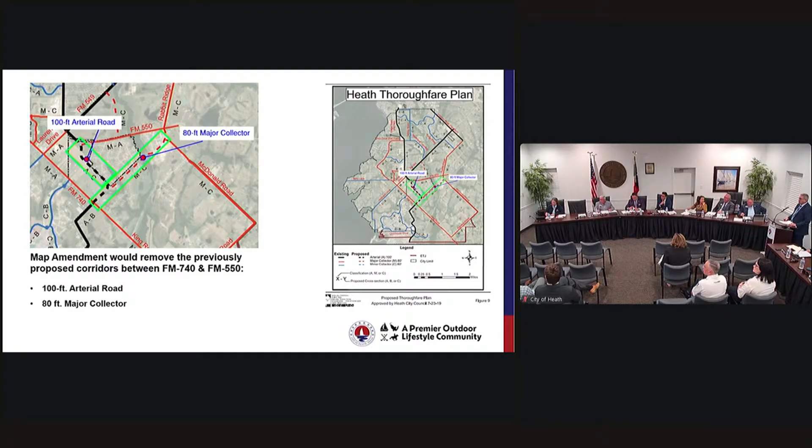This went before the Planning and Zoning Commission as well on May 5th. After discussion with the Planning and Zoning Commission, they are forwarding a recommendation of approval for this map amendment. We did provide public notice as well on the city's website as required, and staff is following the recommendation of the Planning and Zoning Commission as well for the amendment. And this obviously is a discretionary item for the city council as far as approval.

With that, I'm available for any questions you may have. Very good, thank you, Mr. Gonzalez. At this time, the chair has opened the floor for any questions of staff.

If not, we will now move into our public hearing. We will now open the public hearing at 6:35 for any residents that would like to speak for or against. Please feel free to take the lectern.

Going once, twice. Very well. At 6:36, we will close our public hearing and then open the floor for further discussion.

Council, obviously we've been talking about our thoroughfare plan at length. We've talked about the county and the county's dedication of funds, allowing us to really isolate some of these FM roads that come through our city and ways in which we can expand them so we can increase our quality of life.

We've had a number of conversations with TxDOT. I'd like to tell you guys briefly, Mr. Alexander, you can step in. Conversations with TxDOT have been wonderful, very open, very transparent. We've had meetings with TxDOT, with the county and their representatives for Precinct 3, Lauren Lichty our county commissioner, as well as who the county uses as a third-party consultancy. All of those meetings have been wonderful.

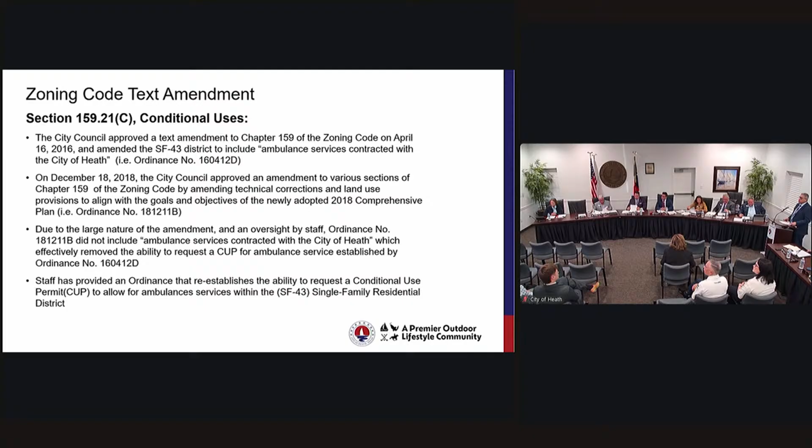At that time, there were many technical corrections to the 2018 plan, and during that portion, the amendments to the code for 159 had a lot of changes, some strike-throughs, some deletions, and so forth. However, in the 2018 code, how it read, it did not include ambulance services as it was approved in 2016 in Chapter 159 under that regulation. So we're here this evening to bring this forward to you, to take a look at this once again, to essentially reestablish that. What had happened, it looked like an inadvertent staff mistake, I guess, in essence, that was not included in the 2018 draft. That was, once again, a heavy lift at that time. Don't have any really hard evidence as to why that did not happen, other than it was not in the staff's memorandum. I provided the 2016 ordinance as well as the 2018 ordinance to show those items that they were not in there.

So at this point, this does require a public hearing. We did provide that in the Dallas Morning News as well as posted on the city's website. And also this did go before the Planning and Zoning Commission. They did hear this, and they are recommending approval, and staff recommends approval of this in order to put back in ambulance services allowed by a conditional use permit under the SF 43 district. Very well, so this is simply administrative cleanup, if you will. Yes sir, that is correct.

At this time, we do have a recusal. If you'd state your recusal. Be for the next item, sir. Very well. All right, are there any other items, Mr. Gonzalez? This will be a public hearing. Yes sir. Are there any questions for staff?

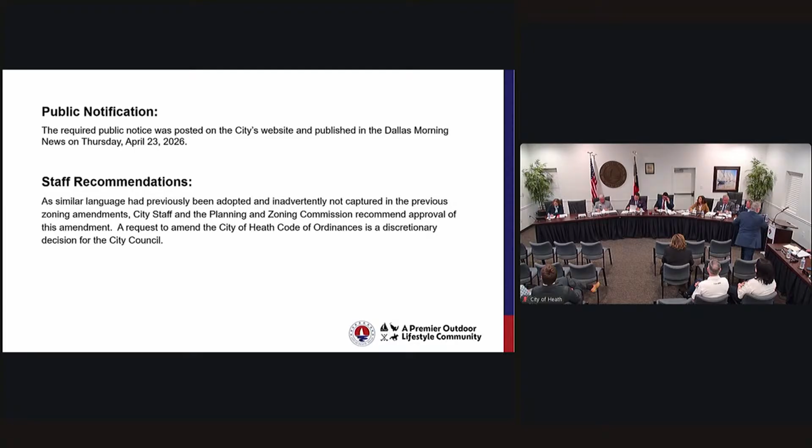Thank you, council. Moving into agenda item 5.c, to conduct a public hearing and act on case number CUP 26-1 for a request from Timothy Wolf of the Rockwall County EMS Emergency Medical Services for a conditional use permit that would allow for ambulance service on the property located at 6834 South FM 549, zoned SF43 single-family residential district, being 1.025 acres, situated in the East Teal Survey, abstract number 207, tract 11, City of Heath, Rockwall County, Texas. Mr. Gonzalez. Yes, sir.

Thank you once again, Mayor and Council. This property, you're familiar with this. Once again, this is kind of a piggyback off of what we just went through. Rockwall EMS has been at this particular location on 549 for some time, and their current CUP that was approved in 2024 has expired. So they're here in order to request the CUP once again to allow for the ambulance service at this location.

We did provide public notice. We published this in the Dallas Morning News, posted a sign on the property, and mailed out 51 notices to property owners within 500 feet. At this time we have 4 responses in favor, 2 opposed to the request. I have 2 additional responses, not in your packet, that are on your desk in front of you. I received those over the weekend, so those are there for you to review and take into consideration.

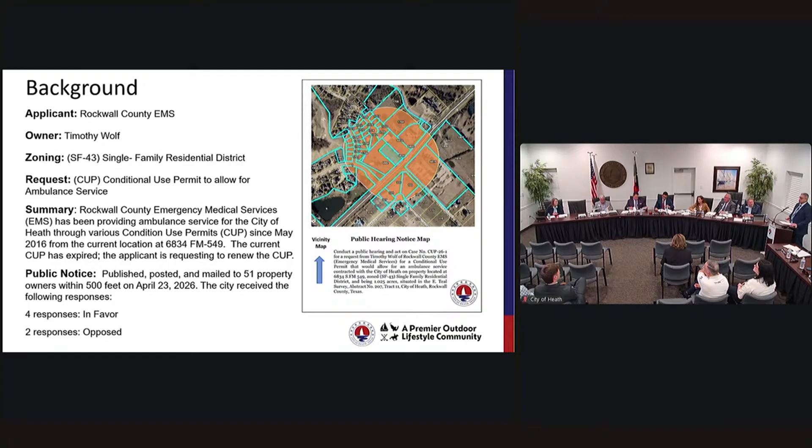Once again, the brief history—there is some history to this location, you've seen it in the past. This was granted a 5-year term, I think that's an important element to point out, in May of 2016. Through iterations here, through CUPs and resolutions and so forth, what has happened is that the facility was to bring the property up to code, essentially, making it commercial, so to speak.

By providing screening, providing a driveway and parking area, and they've done that, as well as provide a covered area for their emergency service vehicles. So the site plan that was approved with this shows that the driveway and the parking area has been completed, as requested by the resolutions and ordinances from the past, as well as the screening and landscaping components.

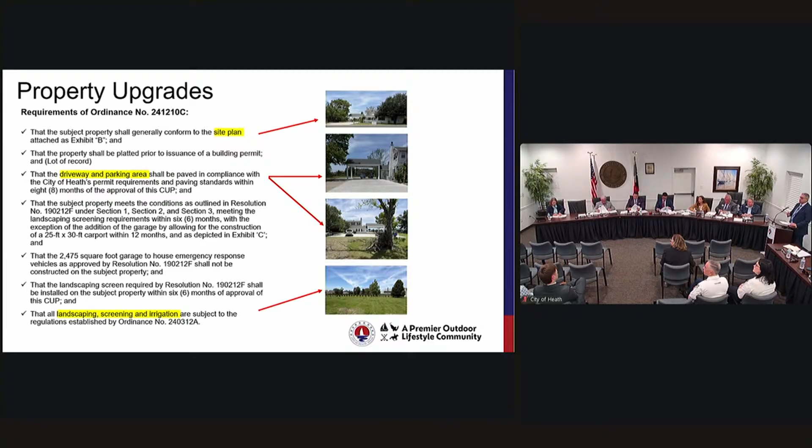And if we take a look at it from a before and after, you'll see the differences. You have a caliche type roadway or access way on the left side. And also here, where you now have a concrete drive area with a handicap ramp.

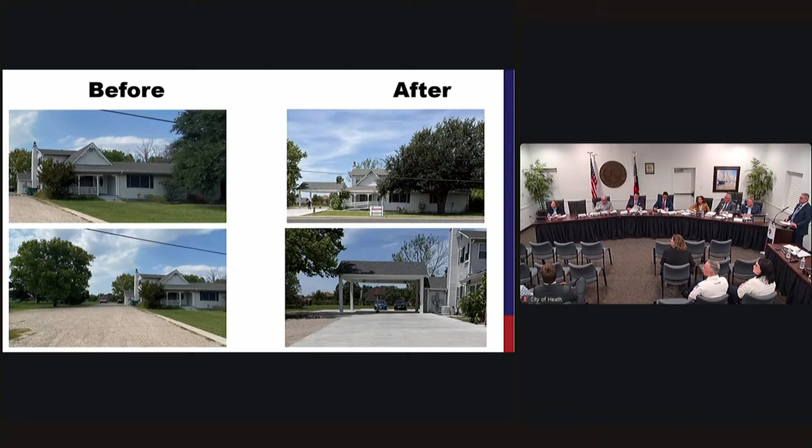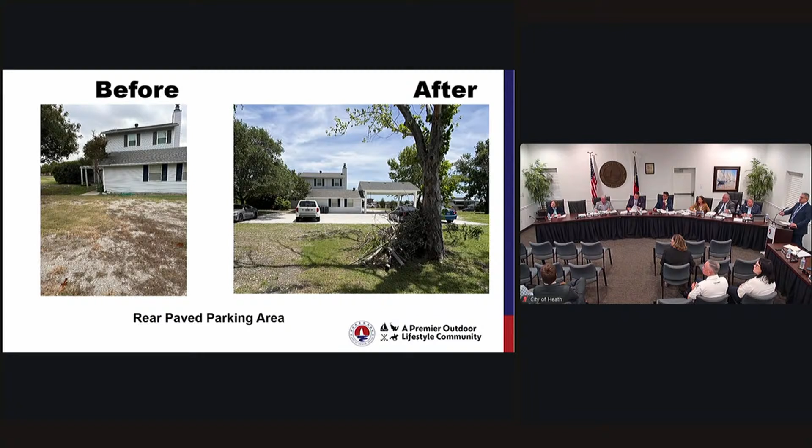They've included a 750 square foot canopy. This houses the 2 emergency service vehicles that will be located at that location, as well as the parking area behind the facility. You've seen the upgrade here—tremendous difference in what was there—and also the landscaping and screening that was required by the resolution.

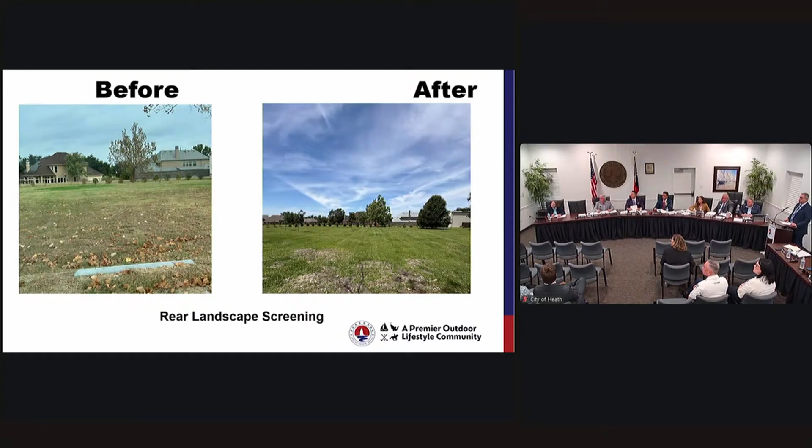So all these items, the construction on the site, has been taken care of. They've put everything in place and met requirements, and so now they are bringing this forward for the application. Once again, we did provide public notice, and staff took this to the Planning and Zoning Commission as well. They're recommending approval, and staff is recommending approval of the CUP as well. Once again, this remains a discretionary decision for the City Council.

Amy Ramirez is here with Rockwall EMS, as well as Aaron Howell. They're here to answer any questions you may have, and staff is available for any questions as well. Very good.

Thank you, Mr. Gonzalez. At this time, do you have any questions for staff? None? Very well. Do you have any questions for the applicant?

Point of information—I have recused myself from this item and have the affidavit on file. Very well, thank you, sir, for putting that on the record. We have the recusal notated.

All right, at this time we will go into a public hearing at 6:51. If we have any residents that would like to speak for or against this application for case number CUP 26-1.

If there's no one to speak, we will close the public hearing at 6:51.

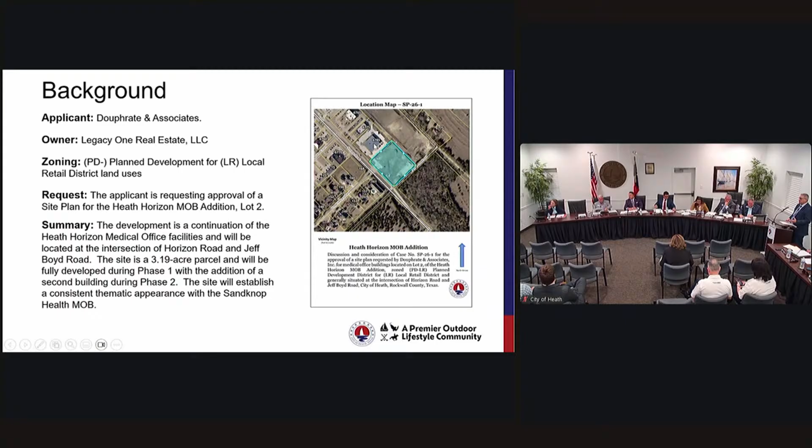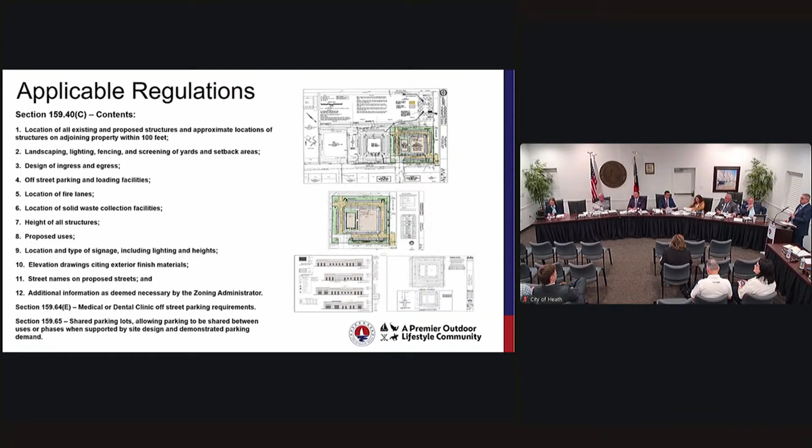Once again, thank you Mayor and Council. This site plan coming before you is more along the lines of a campus type facility, as you'll see in the site plan. The facility next door, the Sandknop Building, was the first one that came in, so this is a continuation on this particular lot. Staff takes a look at the site plan, the landscape, the lighting, the ingress, egress, and circulation, and what the building's going to look like. We worked through that with P&Z and ARB, who reviewed all of the associated plans—you have the large hard copies here as well—and they're forwarding a recommendation of approval.

Let me go through some of this on the site plan itself. The particular use here is a medical office building, parked at 1 space per 150 square feet of facility. Phase 1, this location, is a 20,150 square foot building, requiring 134 spaces. However, when you add in the phase 2 building, the site will be underparked. So to build phase 2 in the future, the applicant is coming forward with a shared parking agreement, which will shore up the required parking. Right now phase 1 meets that with 167 parking spaces laid out on the site plan against the 134 required. There's a letter in your packet from the owner providing 9 parking spaces over on the Sandknop building—they have in excess of 9 spaces there—and P&Z and ARB recommended some cutouts for walking over to the facility, which meets the technical requirements for a shared parking agreement.

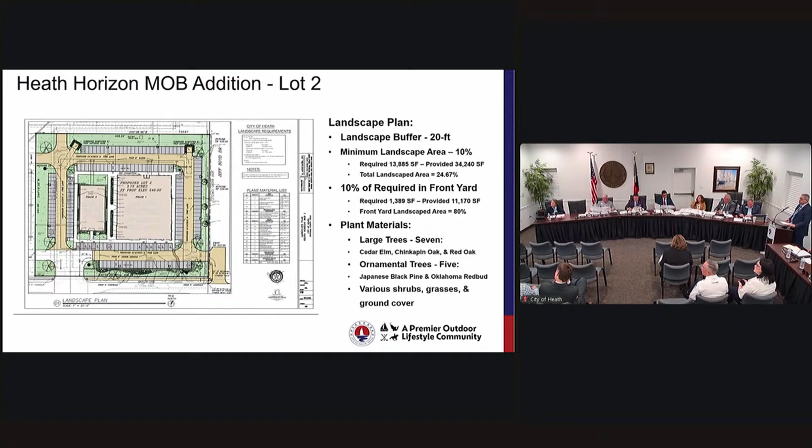We also look at the landscaping—this is over-landscaped, which is great, and meets all the requirements of the Texas Smartscape website for drought-tolerant landscaping and materials. They'll provide 7 large trees, 5 ornamental trees, and an assortment of shrubs, grasses, and ground cover. We also look at the photometric plan. We have the dark sky ordinance in place, and this site meets those requirements—fixtures are shielded, correct color temperature, maximum pole height of 20 feet, with the overall site meeting the 0.5 foot candle ratio required.

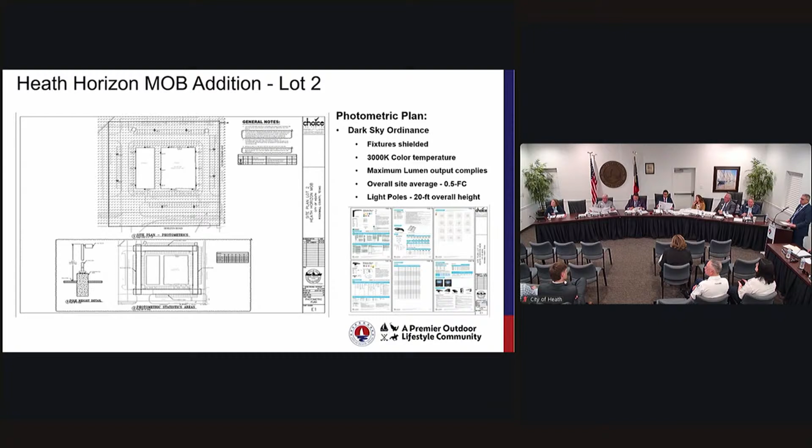Now the building, what you'll see here is that the materials they're using are the exact same materials that you see on the Sandknop building. So this is where you have the thematic appearance of the building that will create that campus style feature here that's going to be adjacent to them.

They're using a brick veneer and a Lueders limestone. You do have some stucco for banding elements along the top. You have some articulation in it that creates some shadow lines and some variations within the elevations that keeps this a nice looking facility.

Overall height of the building is 25 feet 6 inches. That's a whole lot lower than the maximum that they can go. They can go to 40 feet, but they are keeping that as a lower profile unit there for the entry.

Staff did take this to the ARB and P&Z, and staff is providing these 6 recommendations that came from the ARB as well as the P&Z, and most notably would be the parking requirement that they bring that forward to you at the time of site plan for phase 2, and technically the phase 2 portion will probably more likely be approved as an administrative site plan, because everything else is in place. The thing we're looking at is just to make sure that we do have the shared parking agreement and the 9 parking spaces we've outlined here to make sure they meet all of that.

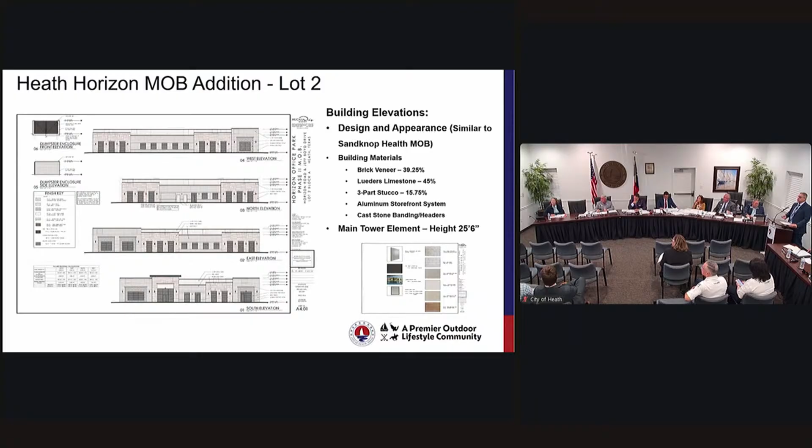Thank you, Mr. Gonzalez. Do you have this site plan laid out on a map so we can see it? You can see it on your slides. In regards to the location, as far as... Correct, so there's a vicinity map. Let me go back to the site. So this is to the north side of the current Sandknop building, is that correct?

This would be on the west side, east side of the Sandknop building. So if you take a look at the Sandknop building here, you have Horizon Road, and Jeff Boyd is on this back side, and this portion is Jeff Boyd as well. So this will be on the east side, making connection here to the Sandknop building. So this is where the circulation comes in as well. So it's on the east side of the Sandknop building. Okay, so it's to the right, and it's the south side of that property. Understood, yeah, southeast. Took me a minute. All right, now we understand where it's at.

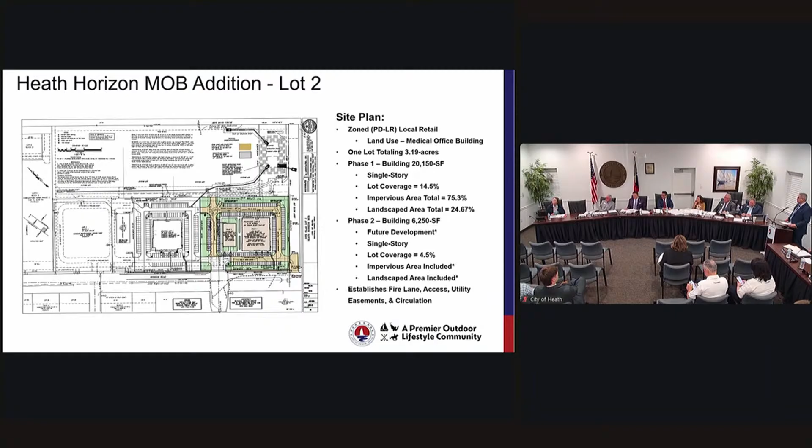Yes. Okay, and on the parking, they're missing 9 spaces, is that what you said? So when they bring in phase 2, it will be 9 spaces short. I'm not talking about phase 2, right now. Right now, they would have all of the parking in place. They have 167 spaces, and phase 1 requires only 134 spaces. Okay, when they build phase 2, that's when they'll need the 9 spaces, and that's when the shared parking agreement comes into play. Understood. Yes, sir. Okay, and they're gonna pick up those 9 additional spaces from the Sandknop Brew? Yes, sir.

It's gonna be tough for them to find 9 spaces at that building if you've gone over there during business hours, extremely packed. And from a planning standpoint, when you take a look at the site plan that was approved for the Sandknop building, they do have 9 spaces available. And so that's how we're getting that number. That's how the applicant determined that and was able to make that adjustment at the time that they originally came in, in order to maximize the parking. Okay.

Very well. Council, do you have any questions for staff?

I have a question regarding the path that was recommended. Is that the yellow highlighted line? That's kind of just an area to show where that could be. There's probably several different areas where you could make that connection.

Wouldn't that take up some of the parking though? They have sidewalk already identified. If you look, there's already sidewalk entrance and exits.

Right, but are we doing a path in the middle of the parking? I don't believe that's what I thought the yellow highlighted mark represented. Is it additional parking? No, the other one - oh, I'm sorry, that's what you're talking about, right? That's here.

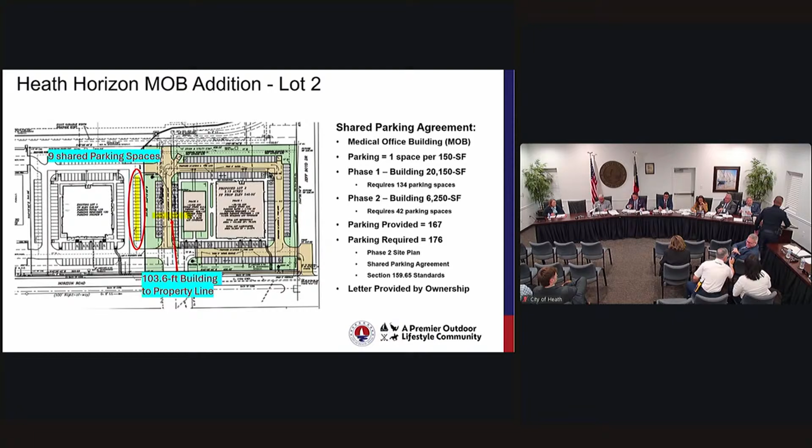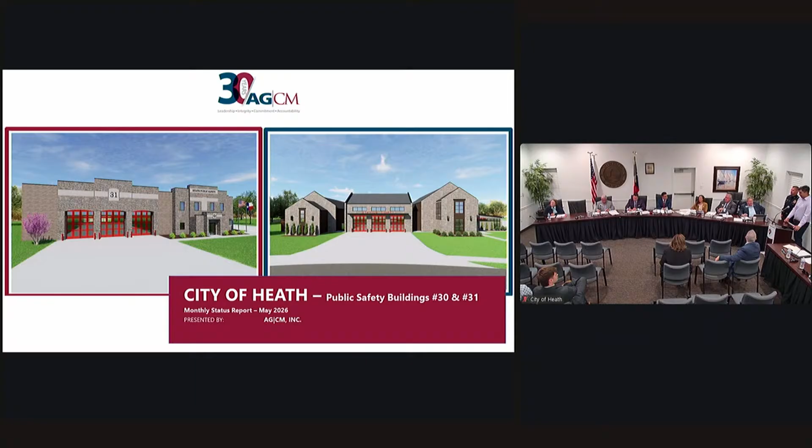Good evening, Mayor and Council. Tonight for your consideration, I have Marcus with AGCM to provide an update on Station 30 and 31. Thank you, Mayor and City Council, for letting us present today. We're just going to give you a quick update of what's occurred in the past month since we've been

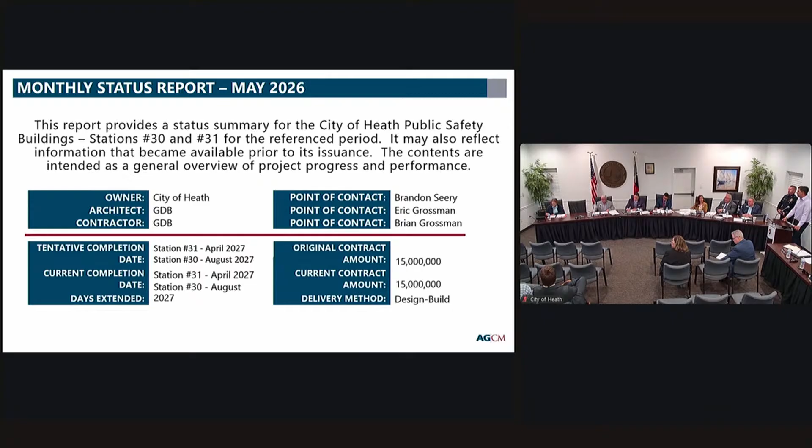out here. One thing that wasn't posted last presentation was we do have an established completion date projected for Station 30. We're scheduled to move equipment out on site today, but due to the rain it just got delayed a little bit, but we will be starting some work on clearing and grubbing out there. That doesn't really slow you guys down much. There's been a few days that I was like, wow, they are still going at it. Very impressive, thank you.

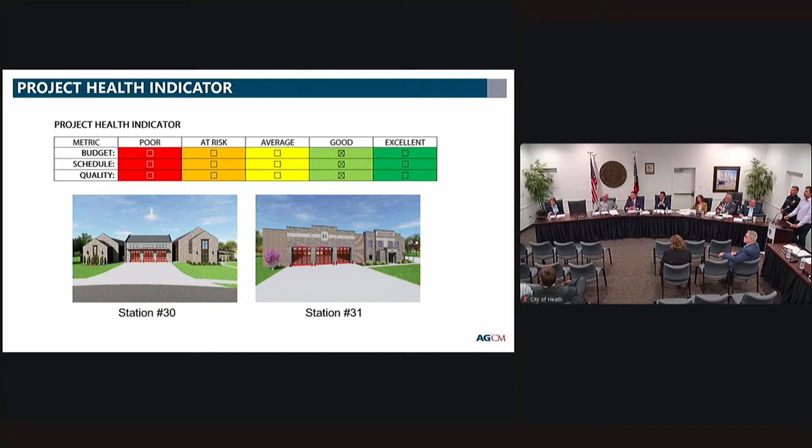This slide will disappear because pretty much we've managed to sustain at the GMP of 15 million. Just wanted to keep this to let y'all know what we established the budget at, but moving forward really no need to reiterate this. A project health indicator: budget, of course, is doing good. Schedule is slightly slipping, but we're still able to improve. We'll get into that in a little bit more detail. And quality is staying up to par, making sure they're looking into the materials being installed.

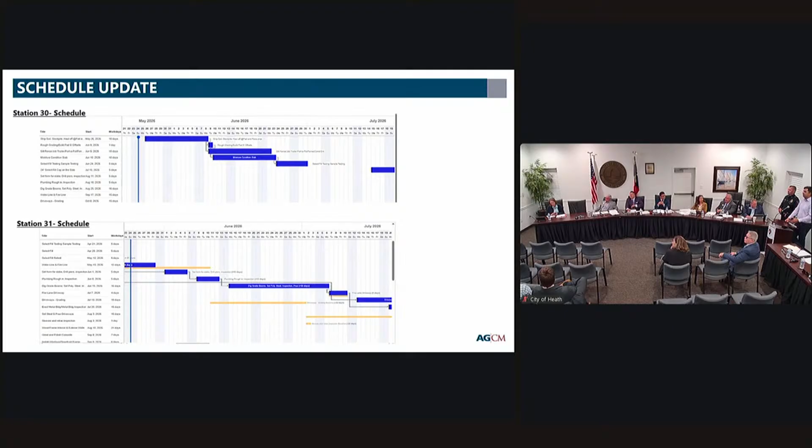Here's our current schedule for Station 30 and 31. As you can see, we had a scheduled start of the 26th for 30, and then just kind of the projected outlook for the next month. Station 31, I'll get into a little bit about why there's delay, but one thing is that Grossman has stepped up and created an accelerated schedule to accommodate the issues that arise out of the project.

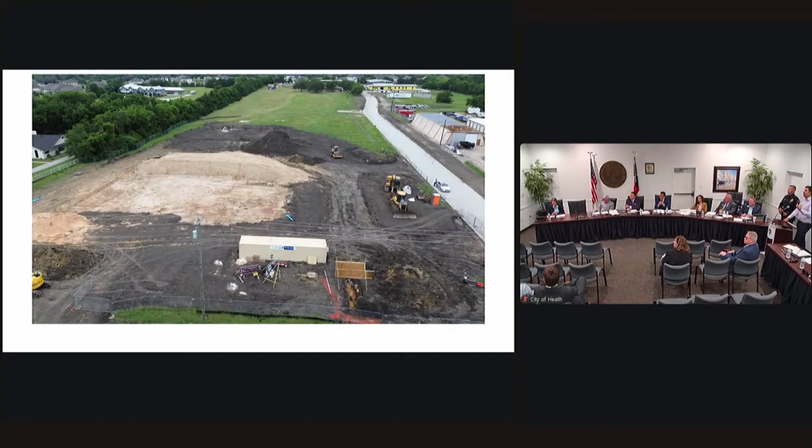So here's an aerial, or is this the video? Okay, so here's a video kind of showing you what's ongoing. As y'all notice, all this select fill has been moved off the building pad, and that's kind of where our issue currently is. We spent a decent amount of time getting the correct proctor and material selected, and once we got it delivered, one thing I want to compliment Grossman Design on is they went above and beyond and did quality assurance to ensure it still met the proctor.

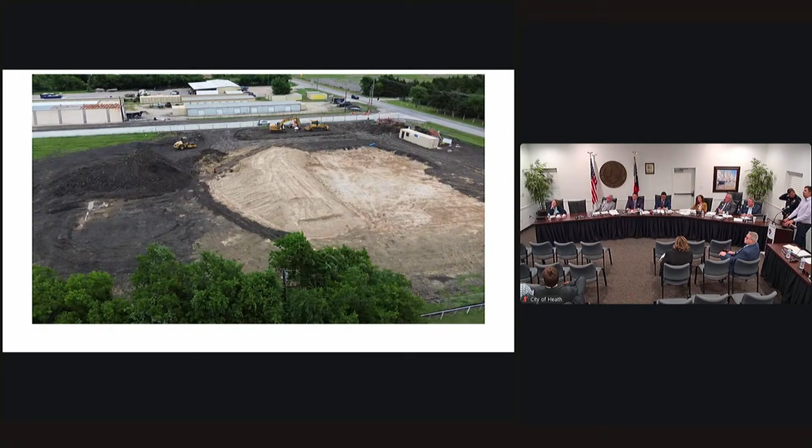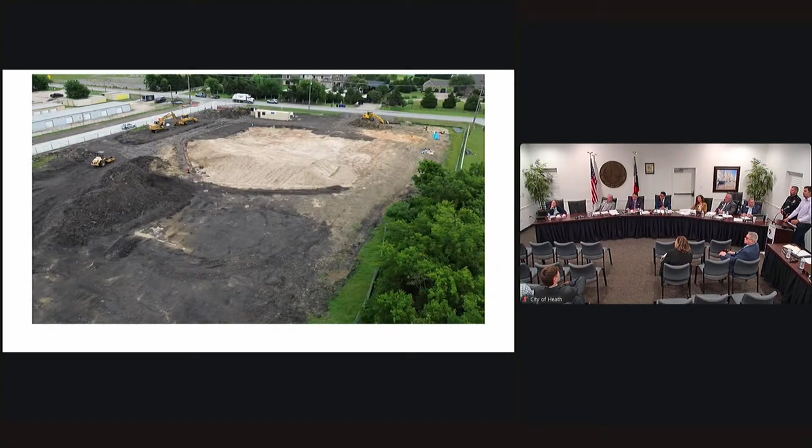After they completed the installation, which takes about a 3 to 4 day process, they tested the material and it was determined that the PI didn't meet the standard. So they took it off and were mixing it, working through to make sure we can get that appropriate PI before we place it back. Grossman Design, we've delayed about 2.5 to 3 weeks with this issue, but they've decided if we're not able to get our proctors up to snuff by the end of this week, they're going to go ahead and get select fill from another quarry to continue on with the project. Still, there is no concern on meeting our initial deadline and meeting our contractual obligations. So I just want to make that clear.

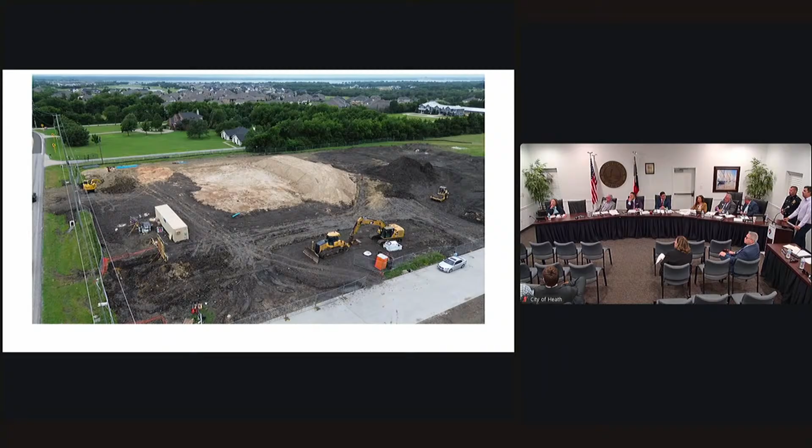Just real quick, here last week they did their initial tie-ins for the fire line. Majority of our underground's been completed, and all of our fire lines are installed. There was a little disruption to the community from a disconnect of temporary water for about 3 to 4 hours on Thursday, but we're back up and running and there shouldn't be any issues downstream. So that's a run through on Station 30 -- apologies, Station 31.

I'm going to provide this document; we're planning on starting today. The other ongoing activities are coordination with Oncor and Atmos to make sure we get the appropriate service and understand where those locations are going to be implemented so we can get the correct pathways. We're currently working with Public Works on a drainage channel where some overgrowth came up, and we're trying to figure out the best approach to continue construction while revising that drainage channel, without impeding the construction schedule or anybody downstream.

Another item, on the bottom left you'll see the mock-up. We initially went through an original selection, and right now we're just trying to finalize our colors. As you can see, it all clashes, and Grossman's first statement was that we're not approving anything right now. The only thing we did release, to make sure we can manage our schedule, is the metal panels for the building. We're going to keep the metal panel right here and right here -- those are going to remain.

Of course, the board and batten colors are going to be revised. We're going to revise the brick, and I believe we're going to keep the stone -- the top gray stone is what we're going to keep. So really these two components are remaining; everything else is going to be revised so we can get a more cohesive color selection, and match the aesthetics of the neighborhood. That was an item Chief Siri wanted expanded upon.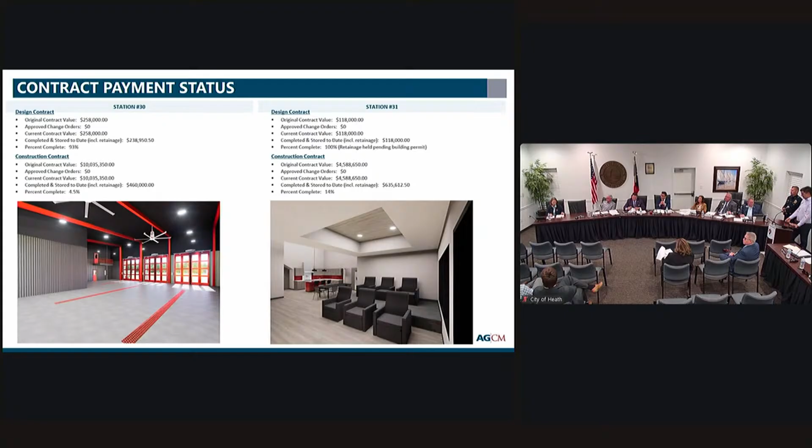That's all I had. And I also want to mention Bob Myers is here. He drove all the way down from Sherman, so we got to make sure he gets credit for coming by. I saw Bob sneak in.

Very good. Any questions? Council, do you have any questions? Chief, question for you. Yes, sir.

Which facility will have your training room, and is that still included? The training room is included. That's going to be at 30. What we're desiring to get is the training structure, that will be at 30 based upon our budget. So that'll be behind that Station 30. Well, the pad's going to be there and everything.

Is there going to be any funds remaining once we get to the end? Because we have some contingency built in. Understood, thank you very much. Yes, sir. Thank you. Great question. Thank you. Thanks again, appreciate it.

Bob, great to see you. Appreciate again the hard work, guys, and again great job. Say you guys stay on schedule. Don't look at any other buildings as any milestone markers. But you guys have been very impressive and very engaged, and it's very much appreciated. So thank you. Yeah, absolutely.

All right, at this time we will move into agenda item 6.c, discussion and update on current capital projects, to include but not limited to the Hubbard Drive project, the Water Bridge Plan, Towne Center Park project, Terry Lane Road rehabilitation, Candlelight Fire Flow, Public Works Facility, Trails, and the Street Maintenance Program.

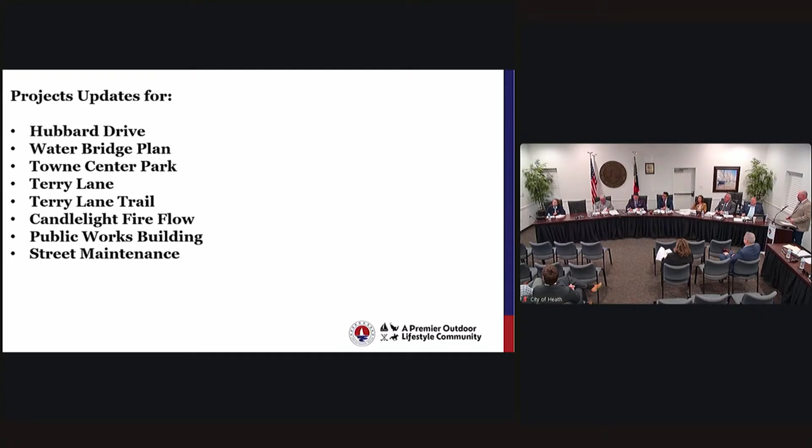Mr. Creed. Thank you, Mayor. Good evening, Council. As you stated, it's a project update for all the projects we go over every month. The first one being Hubbard Drive.

The update on this one is they are still working on the excavation. They've done some ground stabilization. The water line crossings have been put in. Some storm has been put in, not all. We have a sewer conflict we're working on right now. I think we have the change order in with the city and the review. We get that going, and we get the sewer relocated, that's in conflict with that, and we can move on concreting the portion that's already stabilized.

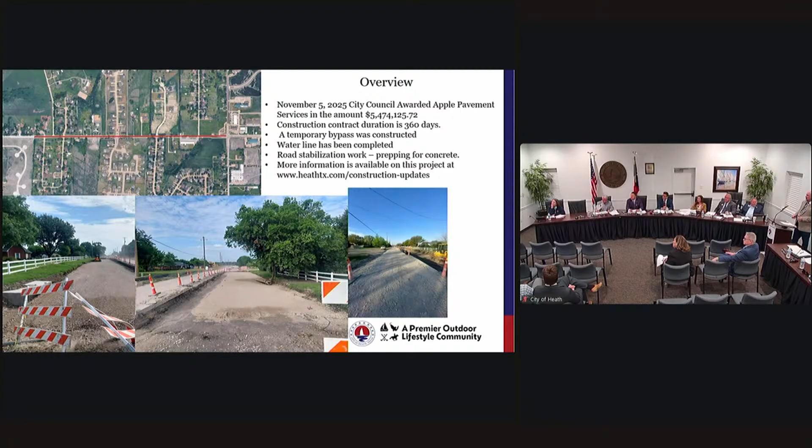If you guys have been out there, you'll see they've excavated and stabilized, subgraded these two portions. Those two photos there on the bottom left, I'm standing at Crisp, and I can look both directions and see the construction area. And the far right is the bypass road. Again, this is the detour map. There's no changes to it as of yet because we haven't completed this portion to move up.

Yes, sir. The delays that we're seeing on Hubbard, does it have to do with this interceptor line? It is not an interceptor, but there are some delays waiting on that, and also the weather is a problem.

And then if there's no more questions about Hubbard - are there any other questions? They have laid some forms on the far end down there and tying in, they have, we were getting ready to do the concrete work. We do have to get past the sewer issue, and then there's some questions about how we're going to move forward with the actual operations of the concrete they're working through as well.

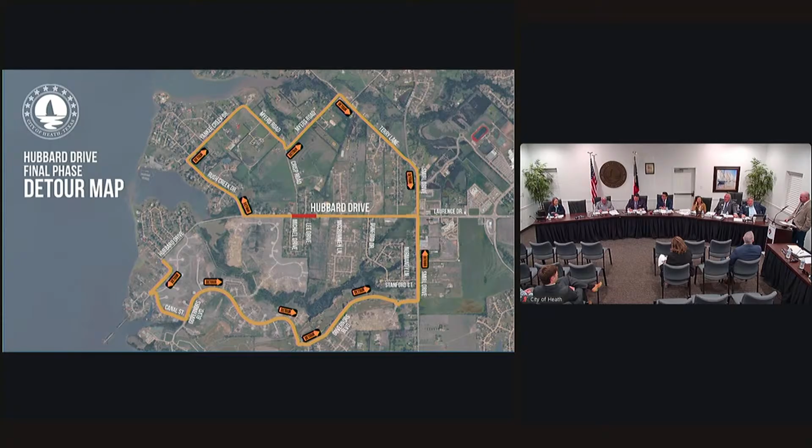That face says it all, though. It does. I apologize. So, all right. Okay. Any other questions? Good. Keep them on track.

All right, the next portion of this is the City of Heath Water Bridge Plan. The first item on this is the City of Heath Water Well number 1. We actually have Kimley Horn here tonight. They would like to give this presentation about the water well. And we have Tanner Henson and Kenny Fryer that would like to come up here. It's always great to see Kenny here.

Well, we're here to talk about water well number 1, which is just over here in Towne Center Park. I'll just cut to the chase - it's good news, 700 gallons a minute. It is potable coming out of the water well, coming out of the aquifer. We just have to dose it with some chlorine, and then it will enter the distribution system.

The driller has been a good partner to Kimley Horn, to the city, city staff - Steve, Brian, Michael have all been great partners, very responsive if there has been a question or anything like that come up. Tanner, got to brag on this young man - he's been down in the weeds, serving the city, answering questions from the driller. He's been doing a wonderful job. So I'm going to let Tanner take it from here.

Awesome, thank you Kenny. Good evening council. So like Kenny said, water's been located, it is potable. I want to give you an update on where we sit right now, the current work that's going on, and the work that is still planned for the future. We had the rig down date on March 13th, so the rig is off-site, and like Kenny said, 700 gallons per minute. That equates to 1 million gallons per day of additional water supply that is expected by next summer, about a 15% increase over the current water supply.

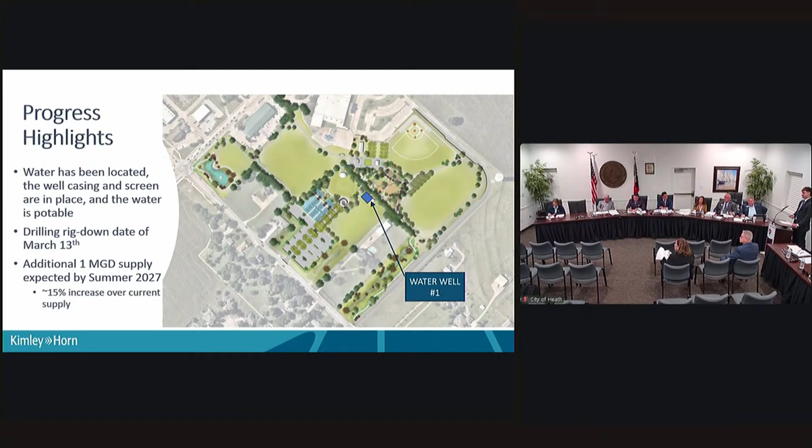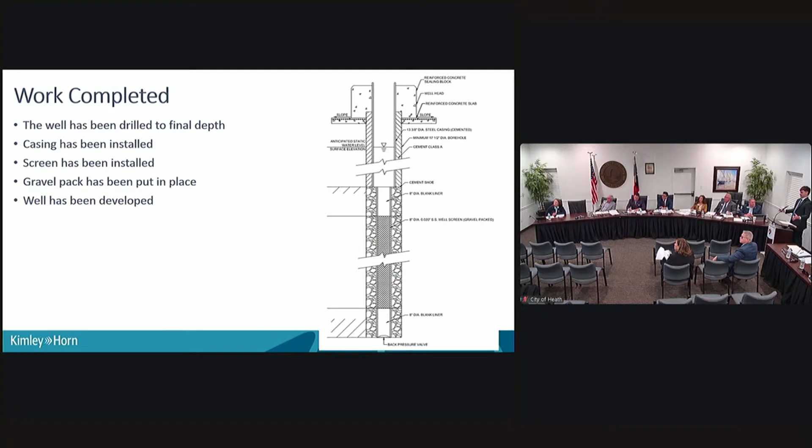For the work that has been completed, the well has been drilled to the final depth. The casing and screen have both been installed. The gravel pack was put in place around the screen to allow the water to go from the aquifer through the screen into the well. And the well has been developed, meaning the gravel pack has been set against that screen and it is able to produce that potable water.

A bit more detail on that well development step - it settles that gravel pack against the screen, and also helps clean the screen so the well can produce more efficiently. Through conversations with the well driller, they stated that this is one of the most successful well developments they've seen, in terms of the quantity and quality of water they saw during the well development process. That gave a lot of confidence towards this being a great well, which we did then see come to fruition through the test pump, which I'll talk about here in a little bit.

That's because it's a Heath well. That's correct, that's why it's better. There was a whole lot of prayer over this site. Power of prayer.

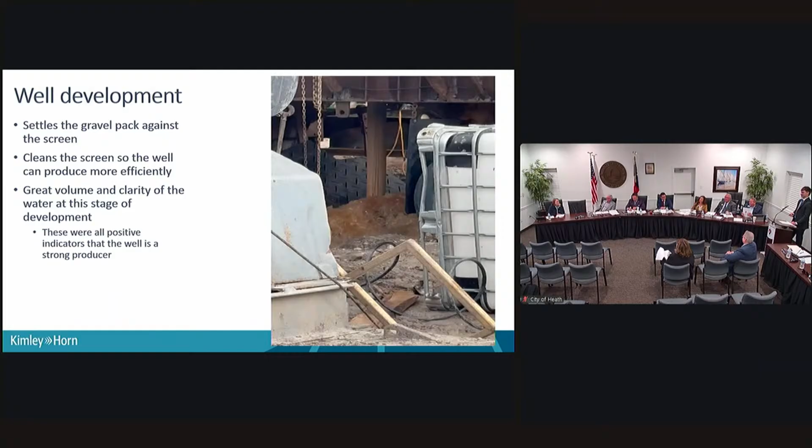Oh, and here is a video of the well development process.

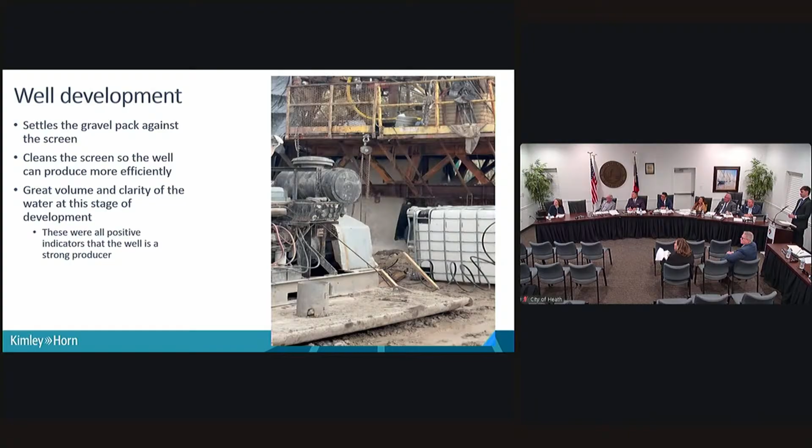That's so awesome, so that is before the test pump was installed. They run giant blowers with hoses down to introduce high pressure air into the bottom of the well, so that it pushes the water up out of the well and then helps set that gravel pack against the screen.

And I'll kick it back over to Kenny to talk about some more work that's been completed.

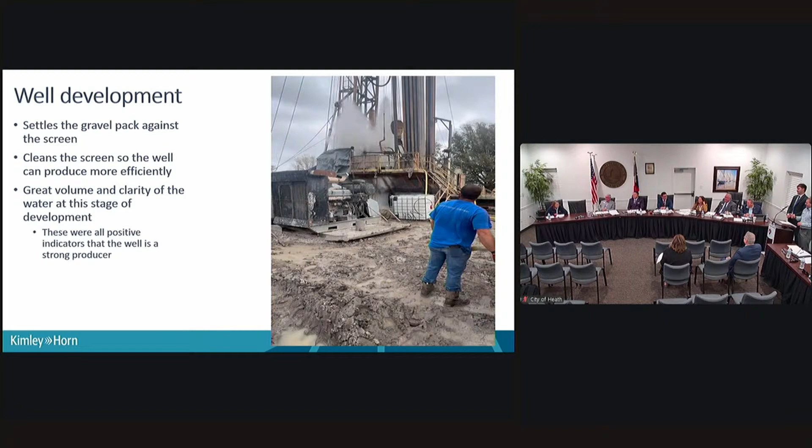I've got a funny story on developing a well. One of the first ones I was able to work on and be on site right after I graduated college, I was the only person around when the water started coming up. I noticed all the other people working on the well had backed up, and then this loud noise came up and I got soaked. So I learned in that moment, watch what's going on around a construction site and do what the other people are doing. Always watch the Roughnecks, whatever they're doing, follow suit.

So work completed to date: the drilling rig has been demobilized, and the pump test performed. What we did on the pump test is we had 3 different intervals at 12 hours each, from 500 gallons a minute, 700 gallons a minute, to 900 gallons a minute. What we want to see there is the aquifer, once it's pumping over the course of several hours, will tend to come to a steady water level, and that's what we really want to see.

The calculation that we take from that data is called specific capacity. A water well between 2 and 5 gallons per minute per foot of drawdown is considered an efficient well. This one was in the 2.3 neighborhood, so a very efficient well. Specific capacity is really just an efficiency calculation.

Water quality testing was performed. All water passed the state TCEQ primary and secondary levels, everything was below the MCLs, and water is not quite potable coming out of the ground. The water becomes potable once it gets dosed with chlorine and enters the distribution system.

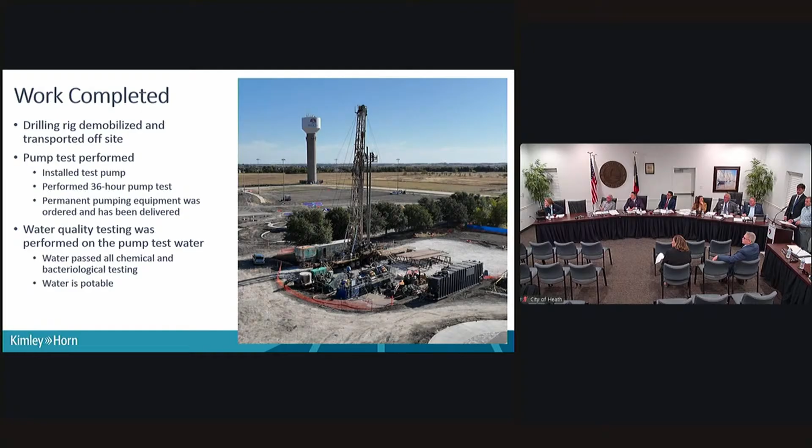So, ongoing work: temporary pumping equipment is going to be installed this week. I got to brag on the driller too - very flexible. When staff came to the driller with here's what we're wanting to do, they were flexible in accommodating that. So they've been a good partner in this project.

The permanent electrical equipment is being coordinated and ordered. Upcoming work is ongoing work at the well site itself, the disinfection site work with the chemical buildings, the injection systems, and the chemical analyzer.

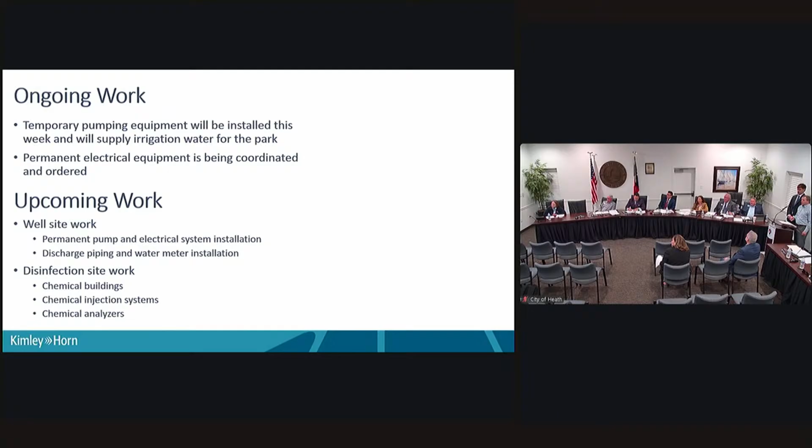So, summary: construction is going well and going in a positive manner. Project is transitioning from the drill phase to the surface work phase, and all partners... Steve, you look like you have something to say.

Kenny, I was hoping you could talk a little bit about the temperature of the water, and how you and Garver are addressing it. Yes, of course. So the water coming out of the well is a little warm - 120 degrees, 113 degrees coming out of the ground. Not a major issue, just a minor characteristic of the water coming out of the aquifer. We've worked with Brian and Michael, and we'll meet with city staff soon to walk through a couple of options we've developed. It's more of an operational thing to cool that water down. Again, nothing I'm concerned or worried about, we'll be able to manage that, just a unique characteristic of this aquifer.

You feel like we'll have to install some sort of chiller, or will just the patterns of the water disperse and cool before it hits the plant? That's one of the options we evaluated. I think the one that makes the most sense in this case is to blend it with water that's already in the elevated storage tank, and that's the best way to cool that water down. Which was one of the original strategies.

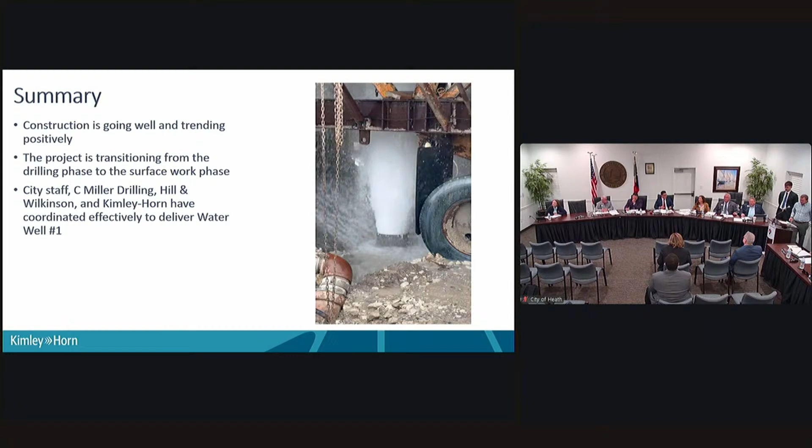I have a quick question. Is it already irrigating the lawn in the city park, or when will that happen? When will we actually use that water?

The well water - they're installing the temporary pump this week. The temporary electrics have been put in. Once they're tied in, they have to finish up the wellhead. We got the sitting block poured last week, so you can see the wellhead sticking out of this concrete block. Once they pull the test pump, which they're literally doing right now while we're having this meeting, they're pulling pipe out of the ground.

I was talking to Councilman Dotson about that, and you can see them pulling the pipe out of the ground. Once they get that old pipe and pump out, they'll put the new pump in, tie in the electrics, and all they've got to do is finish that wellhead, and we'll start pumping water over here. He expects to have that done by early next week, and we can start pumping water into the pond fast.

Wow, very good. Well, I have so many questions, like when that water keeps spurting out and then goes back down, why is that? I'm just curious, it doesn't continue to flow out like that?

No, how do they control it? That's caused by air - they pump air down in there, and that blows the air out, and that's when the water comes out. The development that Tanner was talking about, that was from the air jetting that forced that water out. That's what happens.

So interesting. Is it maybe warm because we've drilled the wells so extremely deep, deeper than most wells have been drilled? That's part of the reason. The Trinity in this area - that's a unique characteristic of the Trinity here - has warmer water, around 120-ish degrees. Other areas of the Trinity are more like 70 to 85 degrees.

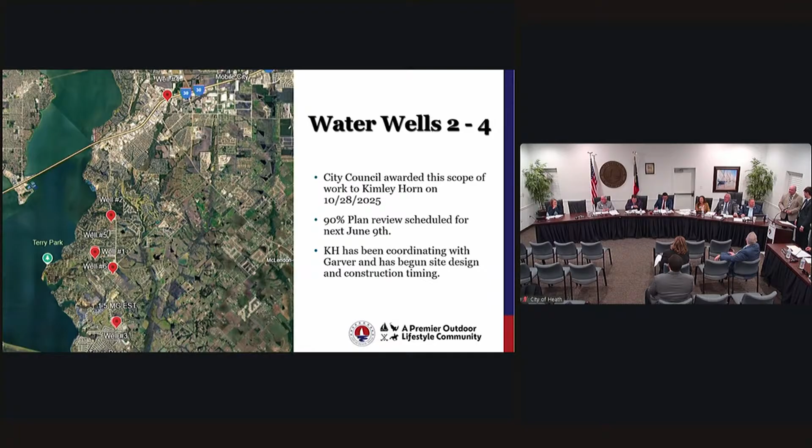All right, Mr. Creedon. The next thing is the City of Heath 1.5 elevated tank that is currently planned to be on Governor's. That went out to bid last week. We have a pre-bid meeting on the 3rd of June and expect to open bids on June 12th. The review after that is anticipated, hopefully, to bring that to you guys for approval on the 23rd of June, and after that we'll be ready to give the notice to proceed and move forward with construction.

I'll answer any questions. This is a 100% design. It's a landmark tower, just like the one you see at Fulton, only bigger. This is the design you see in all the cities. The only thing we haven't completely finished on this one is input on logos. If there's any thoughts, any kind of collaboration with neighborhoods or the school, we would welcome that to move forward.

I believe some discussion was around reaching out to HGYC for sponsorship.

Okay, so that would be one next step. And when you guys are talking about that, are you just simply looking for the council's general direction?

Currently it's slated to just have what we have on the other ones—it'll have the seal of the City of Heath. If there's anything someone would like to see differently, especially the council, we'd welcome that input and be able to get it incorporated into the design. It's not hard to change. We can be pretty far in the process before that's a big deal, but I just want to keep it on your minds if you have something.

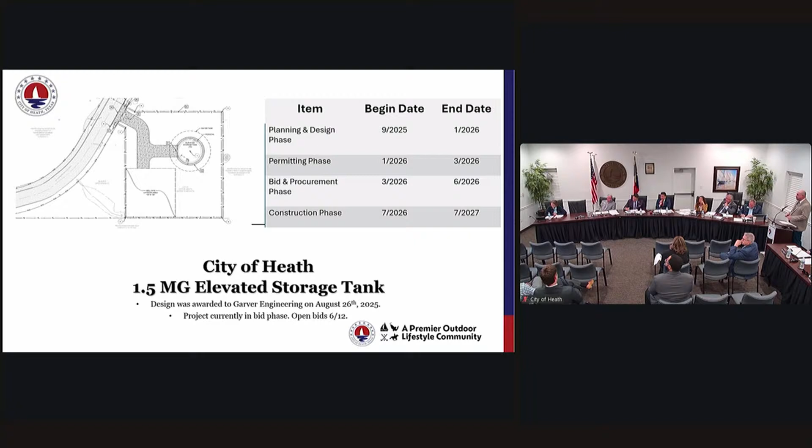All right, very good, so we'll see that at a later day. Council, any questions on that item? Again, transformative piece, so the sooner the better. Thank you, moving on.

The next one is the 3 million gallon ground storage tank that is still in design. We did do the 90% plan review on this one, so we're just at permitting and getting that back from TCEQ. I don't anticipate any issues. This timeline here is what we're following, and with the bid and procurement, it looks like we're trying to go out for this on bid in August.

Is this one in the 41.5 million bond package? So the design of this project was included—the design portion was included, but not necessarily the construction.

You may recall that the way we set up the funding initially was to show the ground storage tank related to the Rockwall water contract, our half of that project. Now it could be that moves at a slower pace than this project does, which is already designed, and we can move forward using—we don't have all the money in there for it, but we have about $4 million in that 41.5 million that could go toward a ground storage tank. So we could use that moving forward if we decide to go ahead and get this done sooner rather than later, as we wait on the Rockwall tank to progress, if that makes sense.

Sure, so we have some flexibility there. And of course, our intention is also to apply for the Texas Water Development Board grant through the WSIG program, which you may recall is that $1 billion pot of money for cities and water supply corporations and that sort of thing, to apply for and get some purely grant funding—not a loan, but grant funding. And we're working with Garver to make that application.

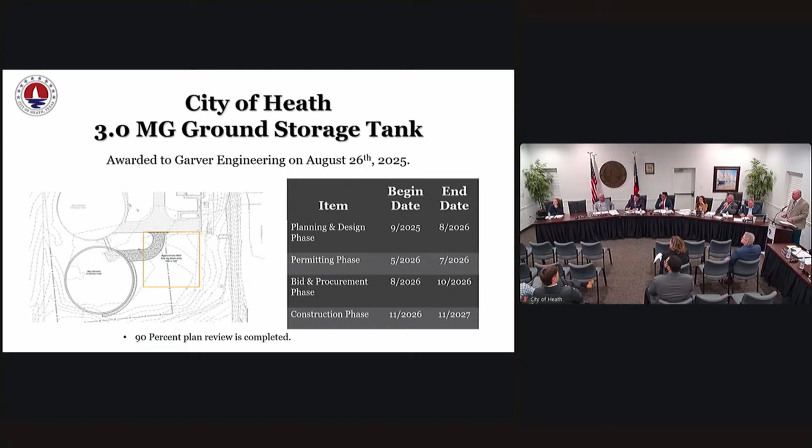Please proceed. All right, the next item is the Towne Center Park. I don't have much more to bring you on the big construction anymore, which means we're getting to the end of this. So I took a bunch of pictures of what's existing out there. I don't know if you had a chance to look at it, but since you're city council members, I suspect you're able to walk it without too much trouble. The park is technically closed, but it looks great right now.

You can see these pictures, everything is substantially complete. We're doing mostly punch list items, drainage fixes, little small touch-up things. There's not any large construction occurring anymore. Hill & Wilkinson has demobilized their trailer. They have a small Connex box that is going away here in the next couple of weeks, and then there will be nothing in the parking lot moving forward. You can see the Heath sign there on the left is your entrance.

I took a picture of the pond. This is all taken this morning. The sports courts were completely surfaced, and they're done. The fence is also up around them. There's a little bit of latching and some adjustment on the gates still to be done, but it's all up and you can take a look at it.

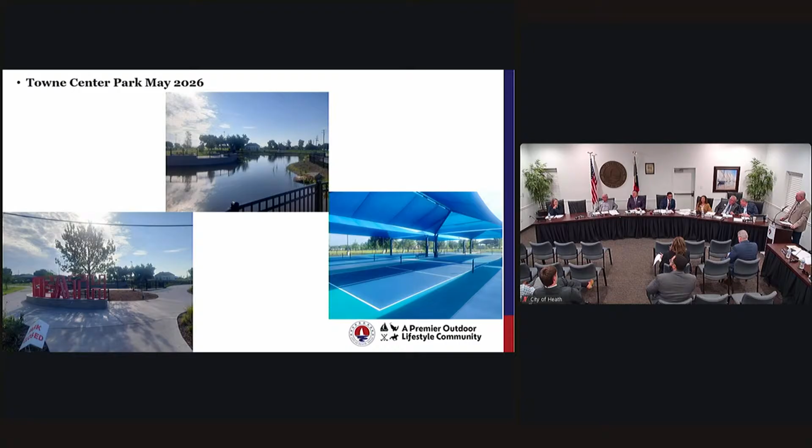All right, okay, very good. And then as far as opening, I know that we've talked about 4th of July being the kind of grand opening of this park.

When do we believe that Hill and Wilkinson will do their final walk-off? So we're trying to schedule our final walkthrough. We talked today, Chelsea was in on the call, and we talked about doing that June 8th for the final walkthrough. And then after that, they'd like to have their punch list completed and be demobilized by June 15th.

I don't know what the will of the council is, but I would say the sooner the better. Open the park, put the hoops up, put the nets up, and let's open it. We can still announce the 4th of July as the grand opening. Sure, we can open it up. People are itching, they've been watching this be built for a year and a half. Thank you for that, Mayor.

Just so everybody's comfortable, if we have an opportunity to go ahead and put the pickleball nets up, put everything ready to go, kind of soft open this facility before July 4th. Council, I know we're springing this on you. I think that sounds fantastic.

I don't have a problem unless Chief takes his camera down out there, because I went and looked at it a while back, and two of the finest pulled up. So what are you doing?

I have a question about the park. So there was some scaling down of some of the features for cost, but there is funding through the state. Would we be eligible every year to apply to that funding and every year maybe improve upon what we were able to?

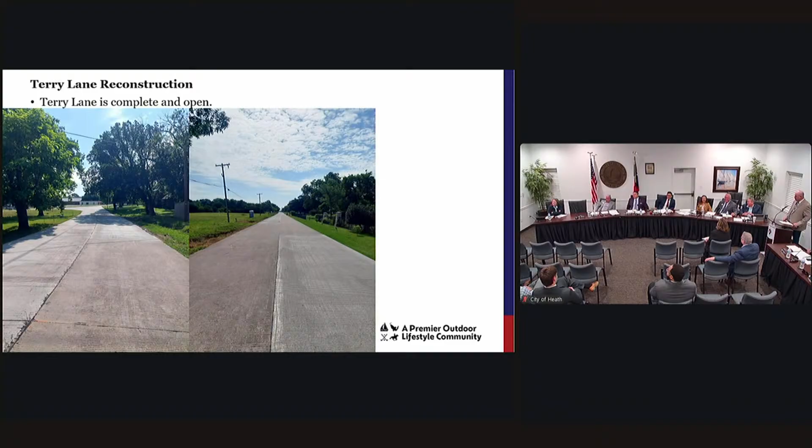The Terry Lane Trail is obviously going to be the next focus on Terry Lane as the road is completed. I've walked through all these steps already. We've engaged with the engineering firms, walked this, got OPCCs. We did right of entries with the residents. We've got the survey done. We got a layout done. We put together all the easement documents. We've yet to procure those because we're waiting on the design to be able to show them. However, we do have a design engineer, and we expect to have that scope in the next few days.

Very good, that's exciting. And timeline from that moment on, if there were speculation? I'd really hate to speculate. One of the things we do need to do is go back to the county commissioner's court and request to use the remainder of the $2 million in funds, which I think is about 450. Yeah, it's 1.55. So about 450,000 left, and get their permission to use it toward Terry Lane. But I would guess it's going to take 60 to 90 days for design, and put it out for bid, and then we'll get you an answer in time. Very good, thank you. Terrific job.

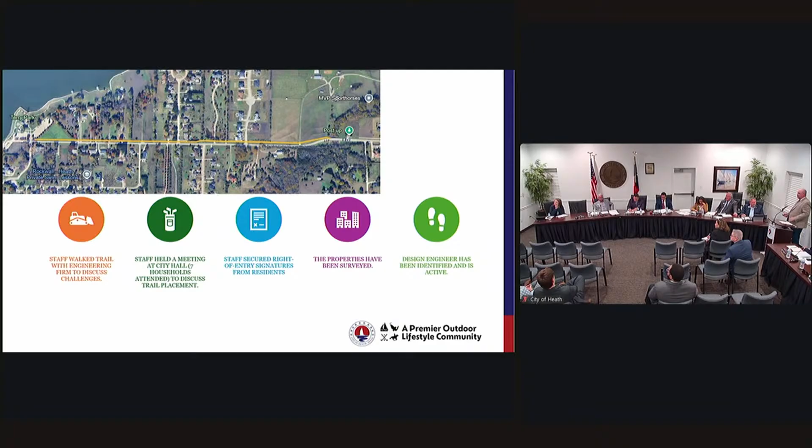Okay, the Candlelight Fire Flow Project. This project was awarded to Hayes Construction as part of our 5-year, 2-year, 3-year plan. It keeps getting reduced, but we like it. We're moving forward with it.

And you guys are doing the engineering for the rest of the projects, correct? Yes, all the rest of them are already under design. That's correct. And this will all be on the opposite side of the road of the trails that are existing? Correct, so the trail is anticipated to be built on the north side. Yes sir. Got you. That's right. Very good.

It doesn't have anything to do with this right here. Okay, but I keep asking, because there's some signs out about fiber optics. What do you know? You know anything about the new fiber optic?

They've already put the lines in, now they're saying they start connecting them. I know that they were working in the Dar area this week, and I don't know exactly what they're doing. I think they're doing service taps, much like we would do with the meter, where you'd come down through there and run a new water main, and then come back and put you on the new one to get you off the old one. Although with communications, they just abandon the old one when they're done. And it's not a flowable thing like water, so it's not as intense. But I believe that's what they're doing, they're making the connections. They've already laid the fiber, and now we're going to get your customers on it.

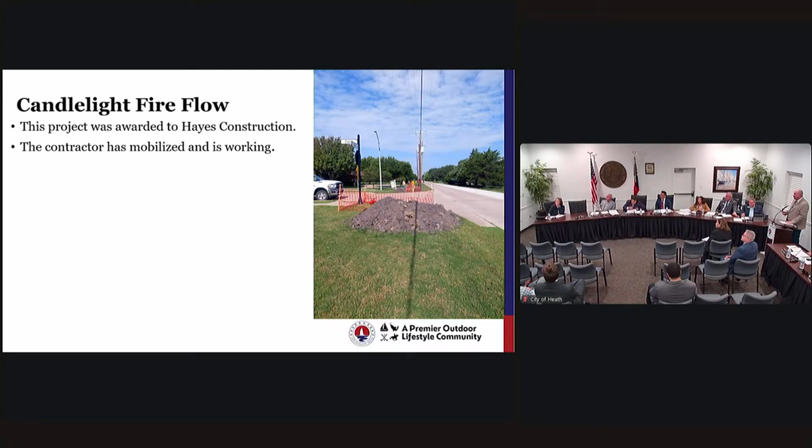Very good. Public Works Building, moving on. This. Just kidding. This. Just kidding. It's nothing, thank you Mayor. And have a good night. Nothing but jokes, I'm just here to help.

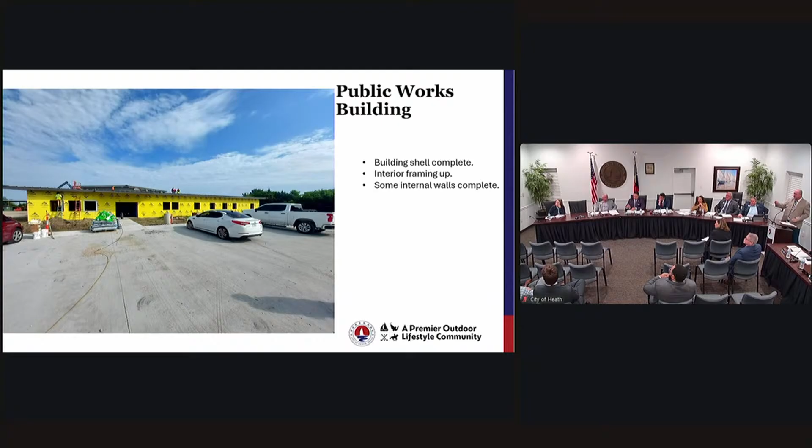So they've allayed any concerns about interior damage? Yeah, it's relegated you're just talking about the structural. So when it was struck by the SkyTrak, they had to go and reshoot all the main beams that go across, and none of them did move. It's all focused around that door and just the purlins around that door. So they got to change that frame for the door, and the purlins going out, and all the R panels going up to the roof and surrounding that roof for 2 panels beyond it. But yeah, we did have all that shot, and none of it moved. So we're in good shape.

That's if we had any luck, we used it because we haven't found it since. I'll be happy to answer any questions concerning that.

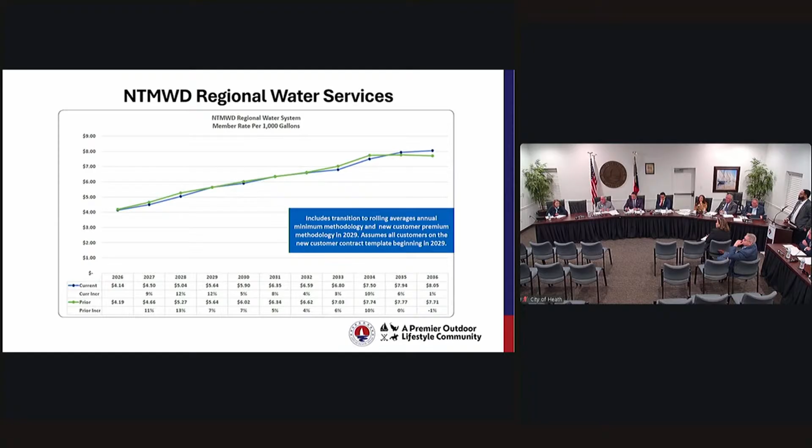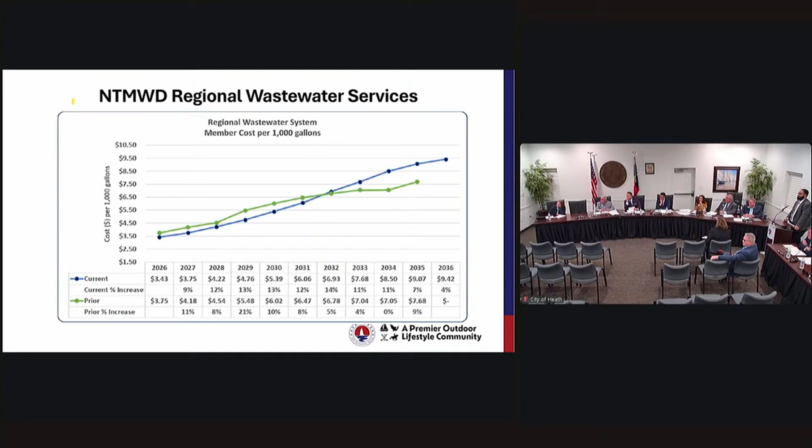So that pretty much sums up my presentation. If you have any questions or any feedback you'd like to give me, I'm happy to address them.

Quick question on secondary meters - maybe this is a question for Lisa. I know all new developments are required to put in that second meter for irrigation. Have we been going back and retrofitting second meter use? We did the AMI single use, but are we requiring any properties other than new ones to have the two meters? Only if it's an old property that only had a single water service and they put in an irrigation system because they never had one - then they have to upgrade to the irrigation meter. So the vast majority of everybody has a single meter. And if they were to request putting in a second meter for irrigation, they would just request a meter tap and pay the fee. Okay, very good.